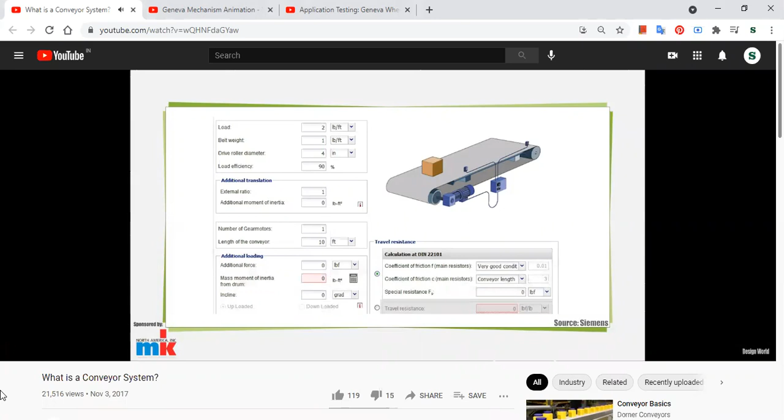Okay, so we'll come to that. These are the questions that you have to ask before choosing any conveyor system. These are the factors to be taken into account. Look for conveyor features that secure or enclose the material or product onto the conveyor. Will moisture be present in the application? Does the application need to be sanitary? Here, look for rugged or washdown rated conveyors with open frames.

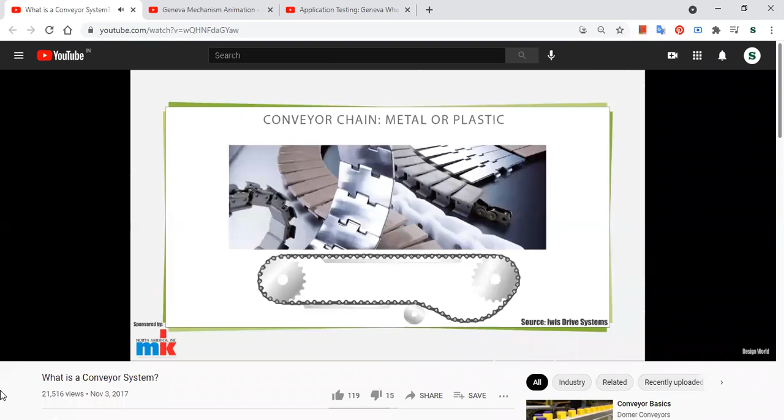Most conveyors in light and medium duty discrete transport applications use a belt that's wrapped around two or more pulleys. A motor powers the pulleys that in turn engage the conveyor belt. Belt styles and materials abound to meet specific applications. Some belts are low friction, so product can slide a bit for accumulation. In contrast, high friction belts have more grip to better hold products. Engineers can design such conveyors to meet exact application specifications.

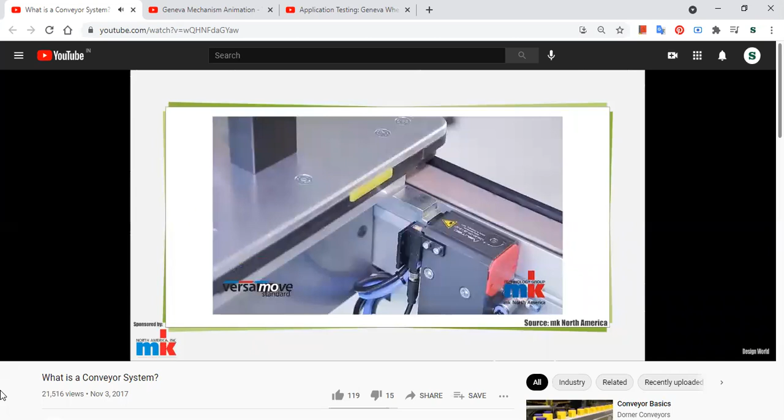Timing belt conveyors use toothed belts that engage synchronous drive pulleys while serving as the conveyor surface as well. These provide excellent belt movement control for accurate part or fixture positioning. Magnetic conveyors are built with ceramic magnets for applications needing parts to adhere to the belt during processing or for jobs that require elevation changes. Higher magnet strength serves inverted applications.

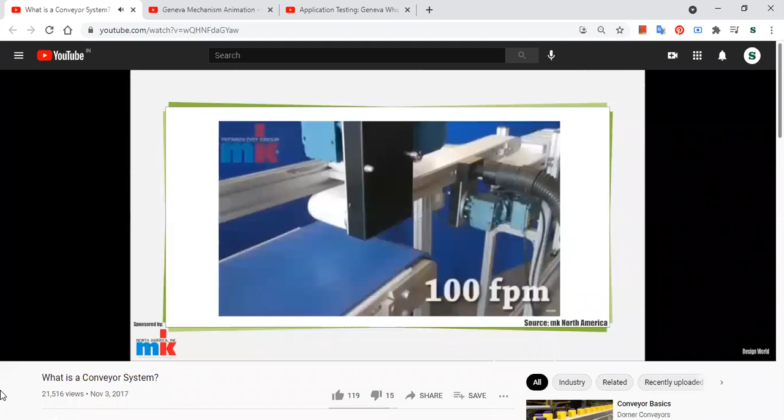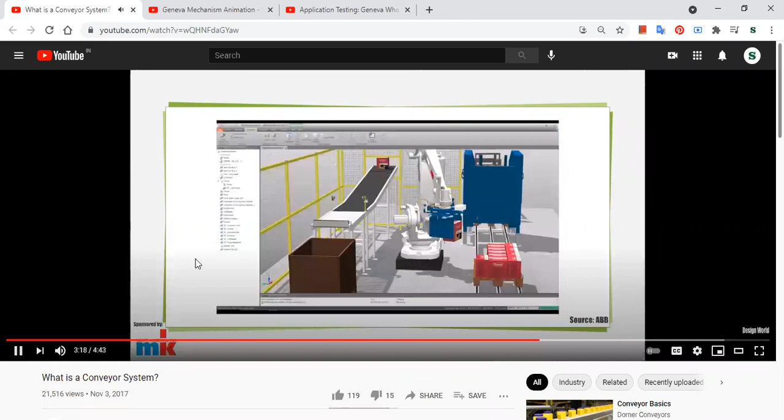Vacuum conveyors work with a perforated belt that draws air through grooves in the conveyor bed plate to hold light or flimsy parts on inclines or during especially fast transport. That was your vacuum type of conveyor system.

Some metal-free conveyors have polymer bed plates instead of steel bed plates where metal scanning equipment checks product, usually food, for contaminants. Last but not least, pivot conveyors mount to a base to swing away when workers need to walk through a line. Some controls can automatically resume product flow after the conveyor returns to the inline position.

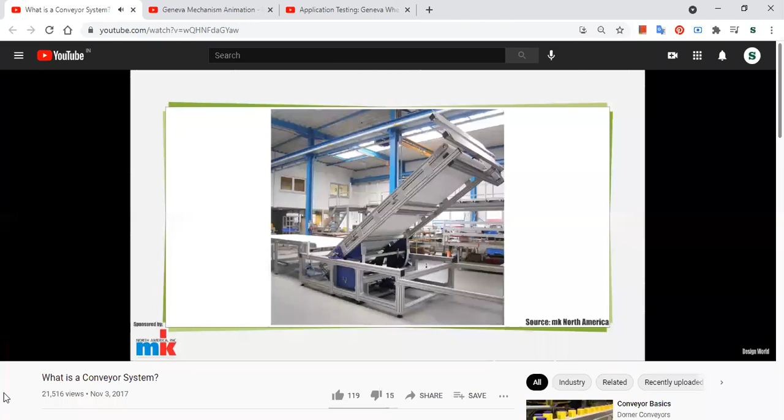Where the conveyor takes the form of a timing belt conveyor, servo drives accurately stop and start the setup to provide precise part location. They also let engineers control acceleration, so they work for conveyors that serve assembly lines. Encoders on a conveyor's drive shaft sense shaft rotation or count pulley revolutions for belt control in feeding or indexing.

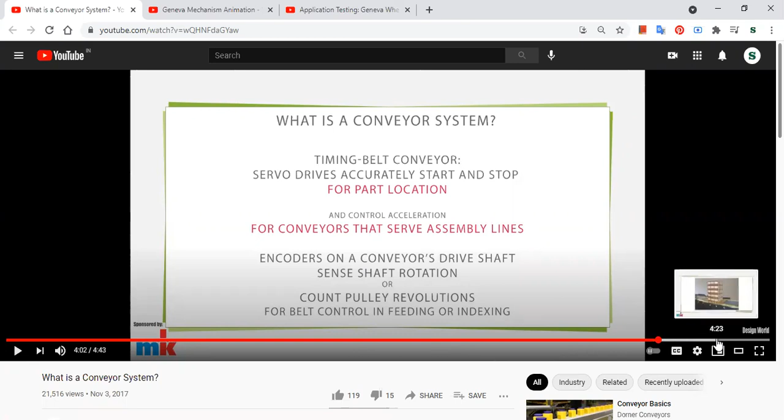So these are all things that you have to consider, right? Because we want to have this data communication between the servo system driving the conveyor system and the different machines, also machine transfer lines. So counting the pulley revolutions and rotation of the shaft, how much the shaft is rotating, etc. So that's about that, and I believe there's nothing more here. So this is clear, right? Conveyor system, what you need to consider before selecting any type of conveyor system.

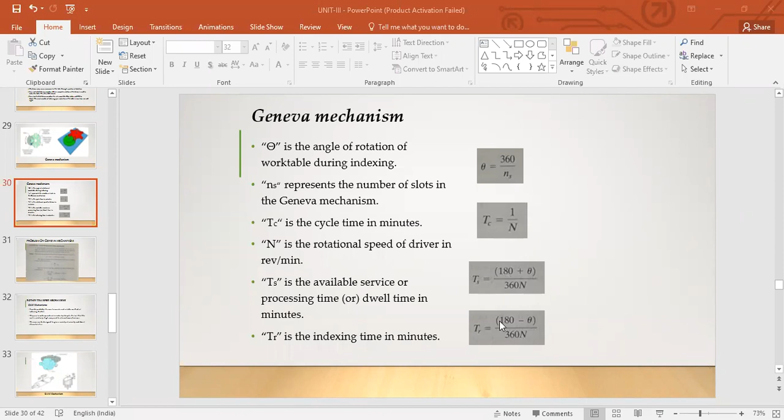And where do we have that? Yes, here you see, if you add these two, what do you get? You get 2 seconds, right? That's your total cycle time. So basically, we are trying to know what is the service time and what is the indexing time.

So you see the driver engages here, right? That's basically where your TS time starts, available service time. Okay, TS starts here, we count it, it moves up here, and here TS stops. Okay, so that's the time taken for the driver to rotate this work table, and the remaining time is your this time, TR. Okay, so if you sum these two, you'll get this, isn't it? So that's your available service time and your indexing time.

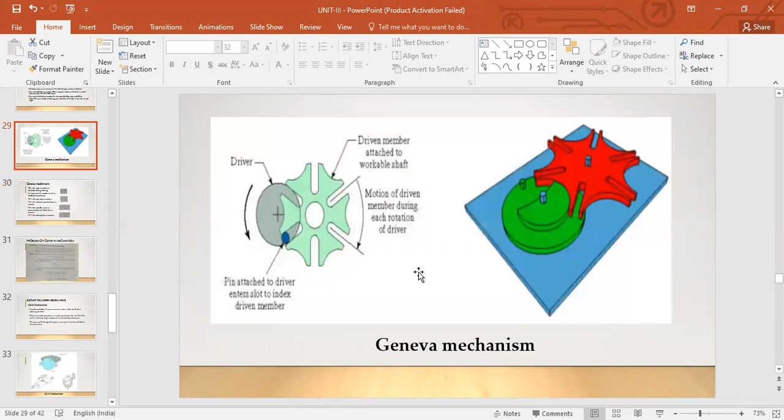Okay, very simple. You have these basic formulas, but you have to get a sense of what it means, right? So if you understand the mechanism, you'll get what we mean by this TS and TR, indexing and service times, isn't it? This is clear, right? Geneva mechanism and the problem that we saw.

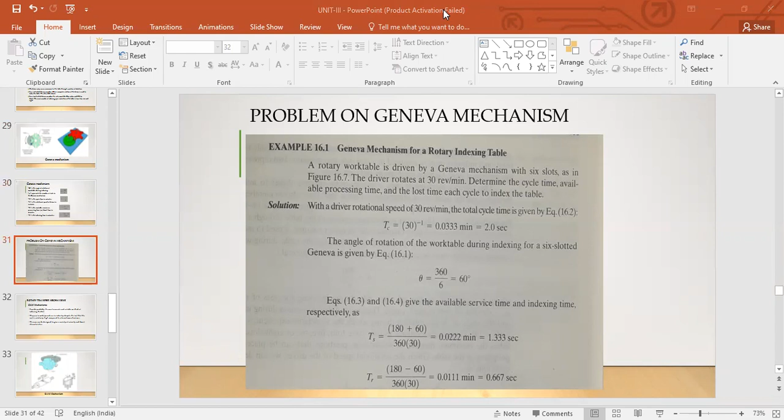Another one is your CAM mechanism. This also comes under your rotary transfer mechanism. It provides probably the most accurate and reliable method of indexing the dial. They are in widespread use in industry, despite the fact that the cost is relatively high compared to alternative mechanisms. A CAM can be designed to give a variety of velocity and dwell characteristics. That's why it makes it more popular.

The cost is high because, to get those characteristics of velocity and dwell, like how much to move, the speed at which it moves, and the precision that you get in a CAM mechanism is quite high. So that's what makes it costly. The design of it is costly, therefore the mechanism is costly. But still it is the most accurate and reliable method.

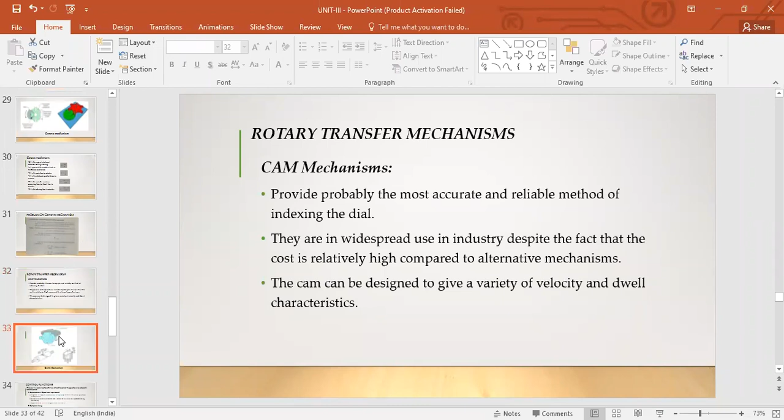You see here, just like in that cam and follower, right? You have this slot in the cam guiding these followers, you can say. So as this cam rotates, it'll engage with these buttons here, and that'll move the plate. That's how it works. So there could be many ways of doing it.

Like here you see, if you rotate this shaft, it is engaged with this, right? So this moves linearly. And the way it moves is based on this profile. As it rotates, because it is engaged with this, it has to follow the profile of the cam. So the linear motion of this is decided by this profile here. That's what makes it more popular, that you can change the profile and that changes the way this moves.

And another one is this, right? If it rolls over this, as per this profile, this will move up and down like that. So that's how we are able to convert the motion of the cam to this motion of the work table. I don't have the video of it, but I hope this is clear.

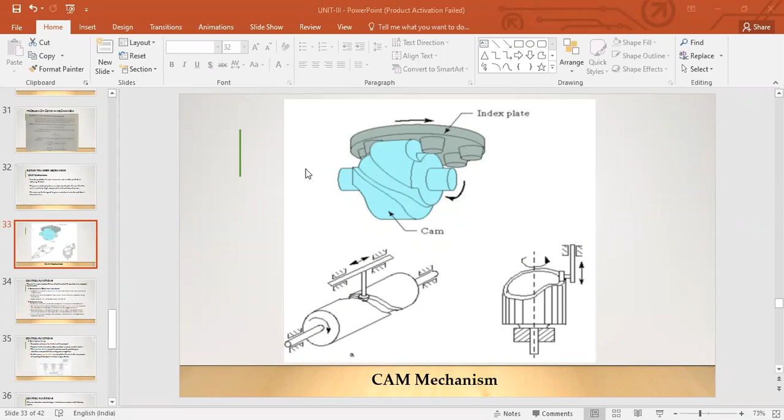So control functions: you see three main functions that we are utilizing, because there are three things that we want to control in an automatic transfer system. First is your sequence control, that is your operational requirement. We want to coordinate the sequence of actions. As we know, in machining transfer systems the operations have to be performed in sequence, so to coordinate that we have to have a sequence control.

Various activities of the automated flow line must be carried out with split second timing and accuracy. We were seeing in that bottle filling, for example, how in a split second that bottle moves and we are able to fill it at the nozzle. Sequence control is basic to the operation of any flow line, because we are trying to integrate different operations and workstations, so you have to have a sequence control.

Safety monitoring ensures that the transfer system does not operate in an unsafe or hazardous condition. As the name suggests, we are trying to ensure safety while the machining is being done, for example on a machining transfer line. How do you do that? With the help of sensing devices, to make certain that the cutting tool status is satisfactory to continue to process the work part in a machining type transfer line.